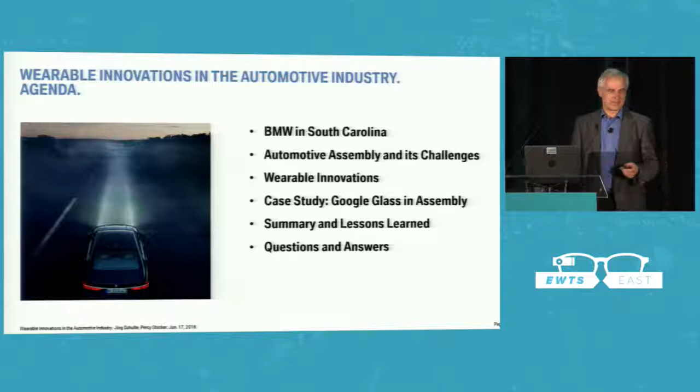We'll continue to do a little bit of ping pong back and forth here, hopefully entertaining and keeps you awake after lunch. We'll take you through a little bit of BMW, not so much the products - I suppose everybody has seen a product around somewhere - but we'll take a look at automotive assembly, where these cars are coming from. Then we'll go into the wearable innovations and projects we've done. We'll focus on one particular case study we did with Ubimax in assembly, go into detail on what we did there and the lessons learned, and then have a discussion afterwards with you folks.

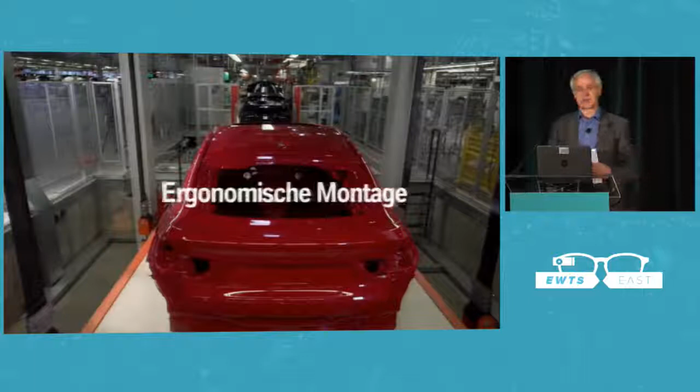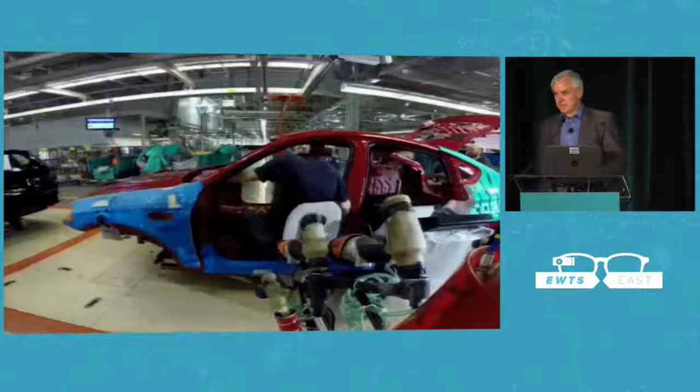So I brought a little video of the plant. This is Plant Spartanburg, it's 21 years old now, opened in '94, and ever since it opened it's gone through a number of iterations in terms of the models being built there. The structure has been adapted accordingly. Over the years it's been expanded to 5.6 million square feet total covered area. The investment was around $7 billion up to this point, and just over 8,000 jobs on site at this point in time. What you see here is a look into the assembly.

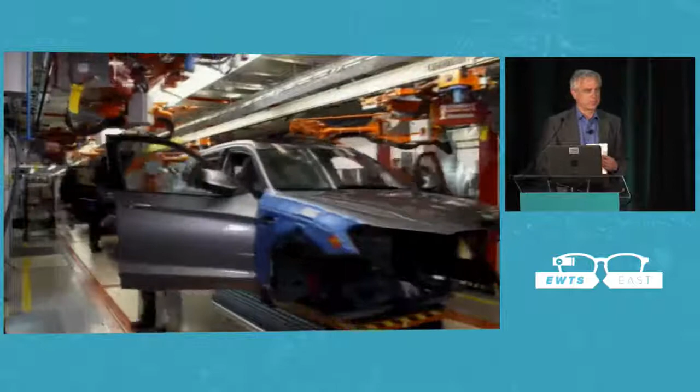Assembly is the third stage of an automotive production plant. Typically you start out with the body-in-white section, or the body shop, where the metal parts get welded together. Then they move into the paint shop, get painted and surface protected. Then they move into assembly, where the metal body gets completed into a complete vehicle.

Another piece of trivia while we're at this: the production BMW is outputting out of this plant is 1,400 units every day, which makes BMW the largest US automotive exporter in 2015, and actually also in the previous years. So maybe something to keep in mind.

Coming back to the 1,400, the heartbeat of this factory is 90 seconds - every 90 seconds we have one vehicle coming out of this assembly line. We have another assembly line that also runs at 90 seconds, and in total that makes the 1,400 vehicles per day, and just over 400,000 units per year. It's really important to keep this heartbeat going, to have that process reverberate throughout all the assembly operations taking place, and that propagates all the way out to the suppliers providing parts just in time or just in sequence.

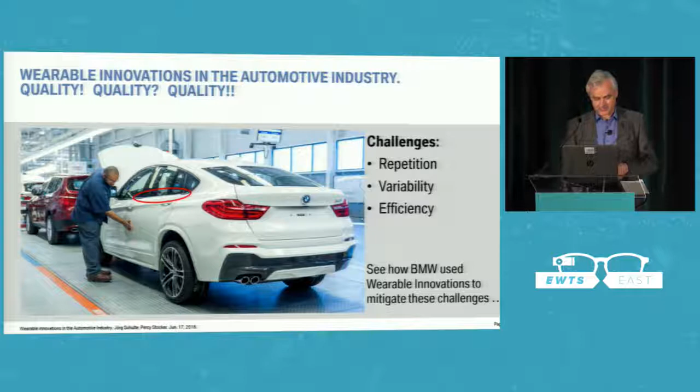Now, for this, there are a number of technologies out there. From my point of view, there are really three big areas opening up that hold tremendous potential to support solutions to the challenges I was mentioning: analytics with deep learning—these kinds of tools are becoming available; the Internet of Things, the connectivity, everything connected to everything else; and then the miniaturization of devices, which allows us to basically wear something like what used to be the processing power of a PC, now wearable in front of our eyes.

The initial focus, of course, will be the miniaturization of devices with connectivity, and that's what we're discussing here today. Going forward, I think there will be a lot more potential once the analytics piece also comes in, once processing power is high enough that we can have wearable analysis of really what we're looking at. But that's, I guess, the future view.

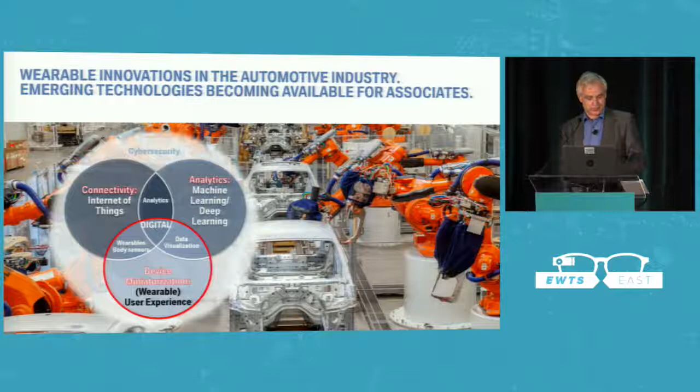All right, so now we'll focus a little more concretely on wearable devices, and more specifically on Google Glass. For various reasons, we chose back in 2014 to do pilot studies using Google Glass initially in our analysis center.

Analysis center—we'll back away from the assembly for a second, we'll come back later on—is something basically like a repair shop, you can imagine. It deals with all the new vehicles and makes sure that when the initial vehicles, pre-series and test cars, etc., are being built, they all conform to standards, that they perform the functionality the way they're supposed to, etc. They also use these facilities during production for any in-depth, root cause analysis that can't be done quickly in the rework area.

The idea was, with this first use case, to really focus on documentation and subsequent communication of defects. So the idea would be that an engineer would record a video, for example, or take a picture, and then relay that information back to the engineering departments. We worked on this with a number of our engineering departments—you can see them there: product audit first and foremost, then the squeaks and rattles team, functional quality team, etc.

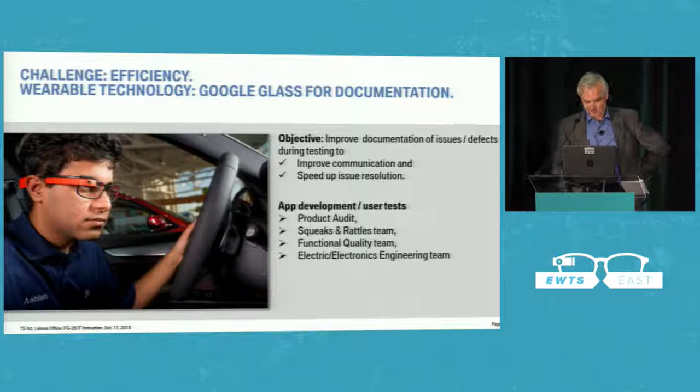And the way we started this project was actually with a sort of mock-up, I guess, at the time we made it—a video showing the functionality.

Okay, Glass. Documentation. Corey Benson, TS53, September 26th, 2013. Shifter rattle. So this seems like it's a little bit loose, this shifter, and it makes a plastic noise while shifting. Send to shifter.

Okay, Glass. End video.

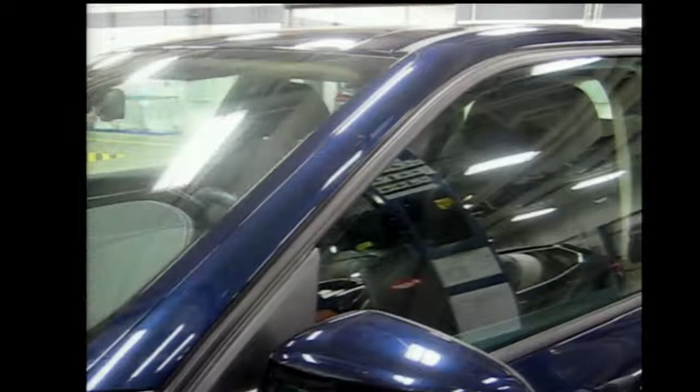Okay, Glass. Call Katie Jerwitz, TS52. Hey, Corey. Hey, Katie. I'm having trouble with this F15 windshield wipers. Can you see it? Yes, I can. I can also hear it hitting the A-pillar. Which car is it? It is 7058. Okay, I'll put in a ticket for it. Great. Thank you. You're welcome. Okay, Glass. End call.

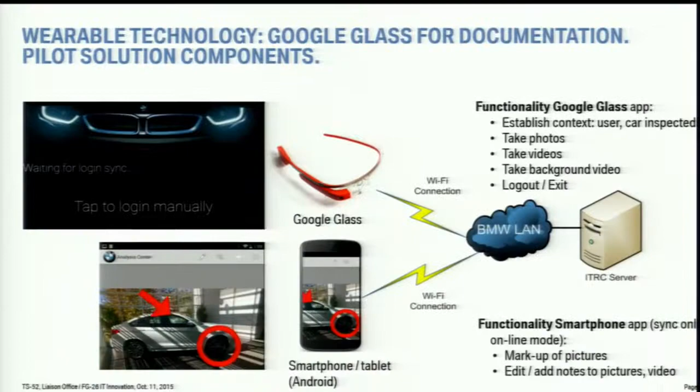So the experience here was that this was sort of the initial idea. Then it very quickly transpired that we wouldn't be able to use the communication function. We had wanted to use our internal Microsoft Lync service there, but for various technical reasons that wasn't feasible. And then the user feedback was such that they said, well, glass is kind of okay, but we want to still modify the pictures afterwards. So we built an additional smartphone solution where you could do a markup of pictures that were taken prior to sending them off.

Now, this project evolved through a couple of stages, but at the end of the day, we did not pursue this further, for a number of reasons. Most importantly, the hardware was deemed not really sufficient at this point in time. In particular, the camera quality for our audit folks, for example, was not up to their requirements, along with a few other hardware-related issues, battery life, etc. And then there's also always the internal processes that need to be sort of aligned here. So it was an interesting and good learning experience and first step for us into this area, but not completely successful at this stage.

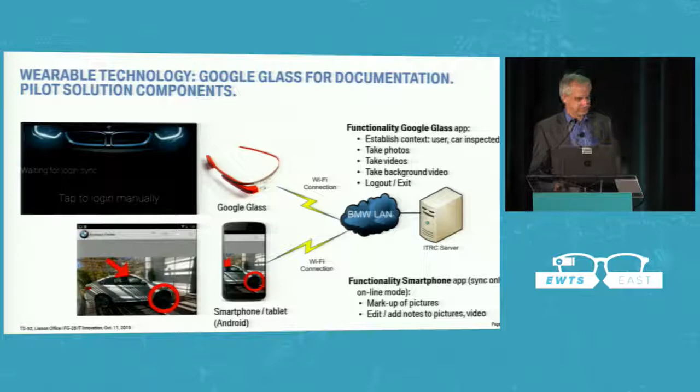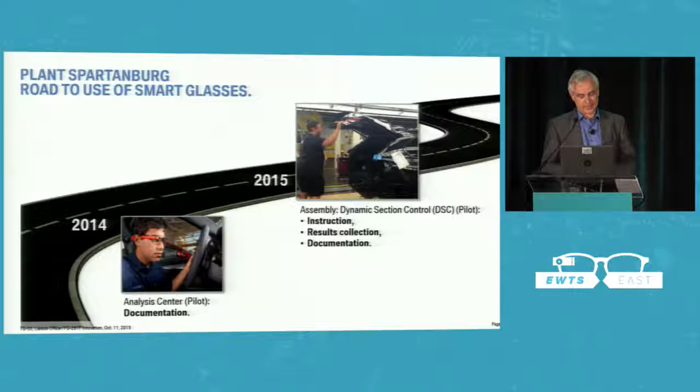Since we did this project internally with the development of the app with our IT innovation lab, we thought, well, maybe some of that lack of user acceptance of software can also be attributed to not doing it properly. So that's when we teamed up with Ubimax and said, let's get somebody in here who can do this professionally. And let's see if we can also move to an area that is maybe in more need of a solution than our analysis center colleagues. So at that point, we started out this project on the inspection in assembly together with Ubimax.

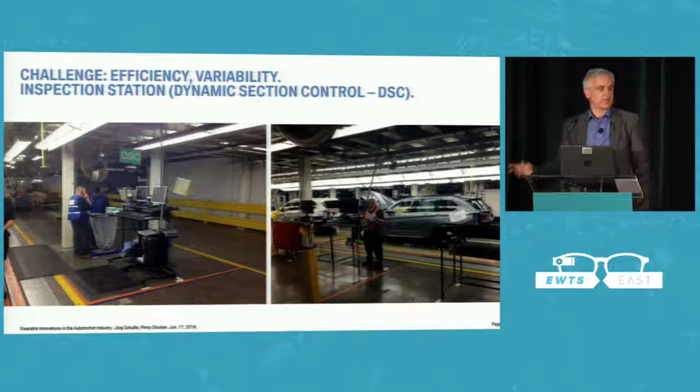So inspection, this is a shot of the actual site that we did the pilot at. It's basically on the line in our older assembly hall. It is an inspection station that has the PC. There, the picture on the left, you can see the PC, which faces the assembly line on the other side. The process works such that the associate uses the information from the car, the barcode that is on the vehicle, to pull up the information on what is to inspect on that particular vehicle. That comes up on the PC display. You can see that on the right. And after the testing, the feedback is reported on that PC.

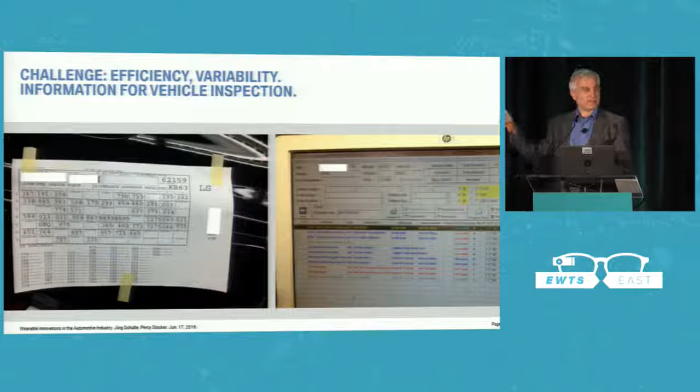The challenge here is, again, the variability and the repetition. So again, the 90-second takt time, the high variability of the vehicle. Every vehicle is different. And this inspection list is not static. This is something that gets updated, as for example, problems with parts coming in which require additional inspections could add to this list of things. Or some internal issues that were found in final inspection would be propagated to this particular station for additional inspection, etc. So it's something that changes over time.

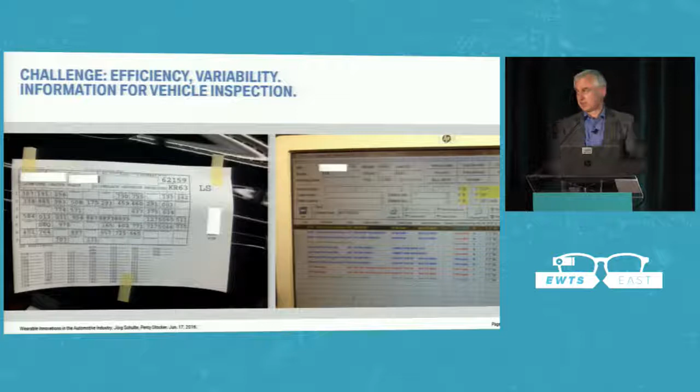And the big motivation for us was to make sure that the associates doing the inspection really catch all the items that need to be inspected and confirm each one of them individually, especially for the more exotic options that they may otherwise overlook.

So it's really the walk time back and forth from the PC, but it was mostly really about the accuracy of the inspection, and then also the communication between inspection and rework that we wanted to improve, because there was a lot of back and forth on questioning, well, you reported a defect for this vehicle, I don't find it, can you tell me what it was, etc. That comes back to the problem that with the PC system you only have particular pull-down menus, and you can't really describe things in very detail. So taking a picture is a lot more useful, and a picture says 1,000 words in this case.

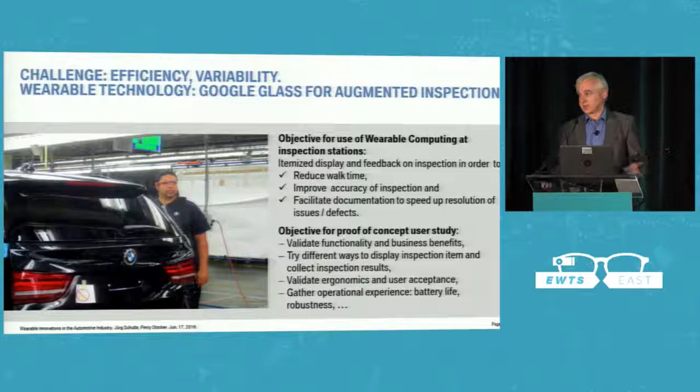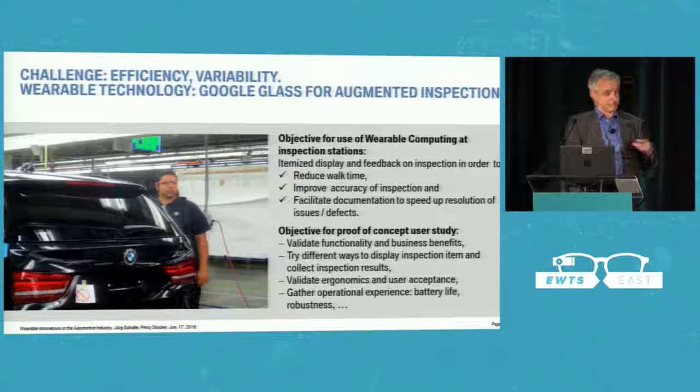So the project with Ubimax focused on really implementing a solution here to validate the functionality and the business benefits of Google Glass here. Work with the associates to see if they would be open to wearing these things, what the ergonomics were, and then also gather some operational experience and see what it's like with the battery life, etc.

Thanks, Jorg. So let me now talk a little bit about the Pilot.

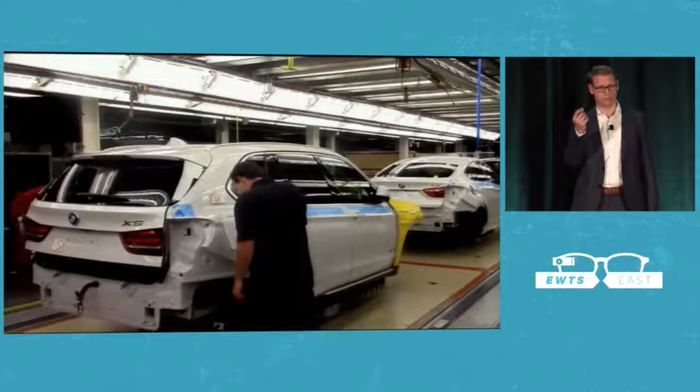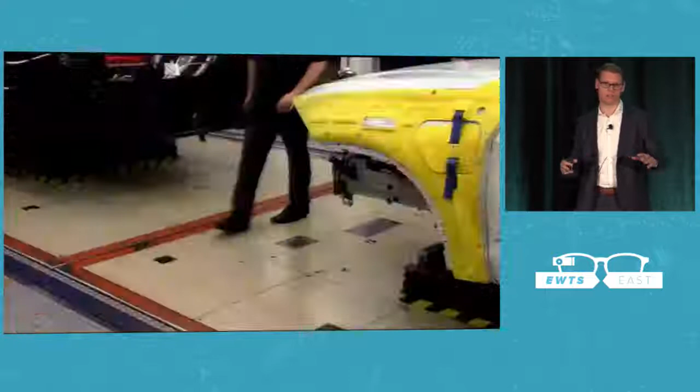We start out showing you a short video so you can see the guy logging onto the system. He's wearing a Google Glass. We stuck with Google Glass knowing there are still some issues with it, but companies are working on that. You can see the guy moving around the car now. This is a classic example of when it's really beneficial to be able to move around freely, and you can see he's grabbing stuff. Having his hands free is key to the process.

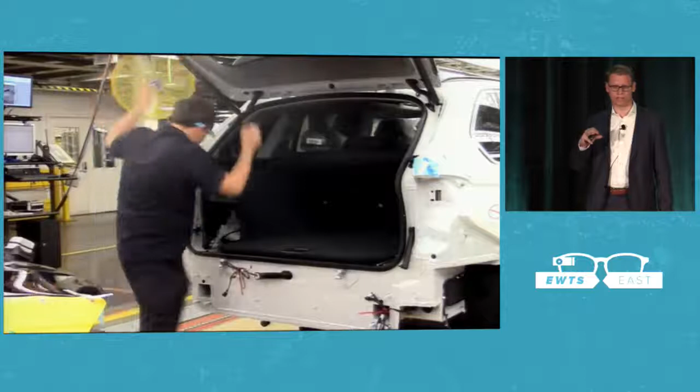You can see he's opening the trunk now, taking a look and using the glass. The glass is guiding him around the vehicle and pointing him to the parts he needs to pay attention to and do the quality checks.

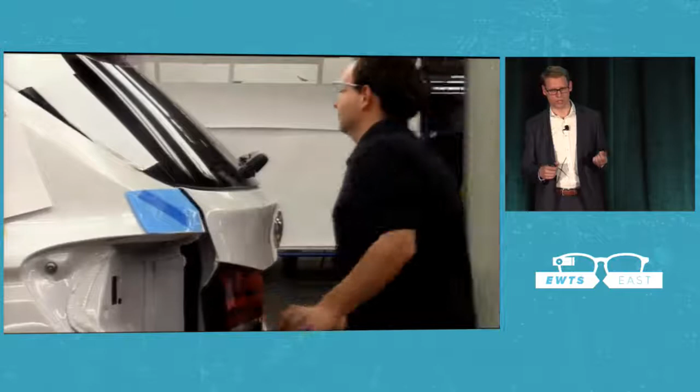The good thing is that we were able to do this really in the productive environment. This is not something offline or done in a safeguarded environment. We really did this on the line in production to get the insights that BMW needs to go further in that direction.

It's also a classic example of where the current technology really doesn't meet the requirements of the process. Having an offline PC — I can imagine I'm doing some work here, and the information I need is right on that laptop, maybe even further away. How am I going to not miss any points if it's not a standardized process?

Every car is different on the production line, and there are different spots I need to take a look at. Even for each model, these spots change in terms of the current findings from production and what parts need a specific look. So I've lost right from the beginning if I'm going to use a model like that.

But if I use wearable technology, I have the information right in front of my eye that I need, and then I can freely walk around and do the documentation where I find it — instead of, when I walk back, having probably forgotten most of the parts I wanted to note down.

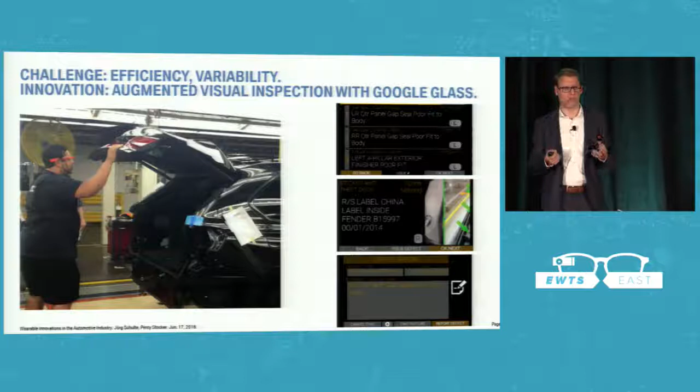You can see in the middle picture here, you have some additional information, a picture showing you what to do, some indication that it's on the right side of the vehicle. It's very easy, grabbable information from a visual point of view to guide you to these points, and they can change over time.

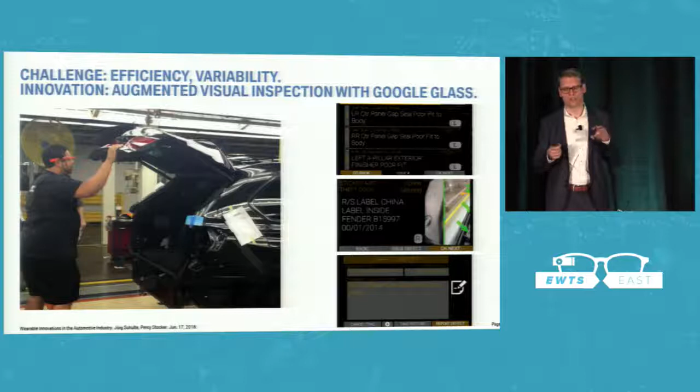When you actually come across a defect you want to document, you can do that right at that point in time when you find it. You don't have to move somewhere else — you can take a picture right then, select via voice from a certain amount of error codes the right one, and document the defect right at that point in time. That's very powerful to do.

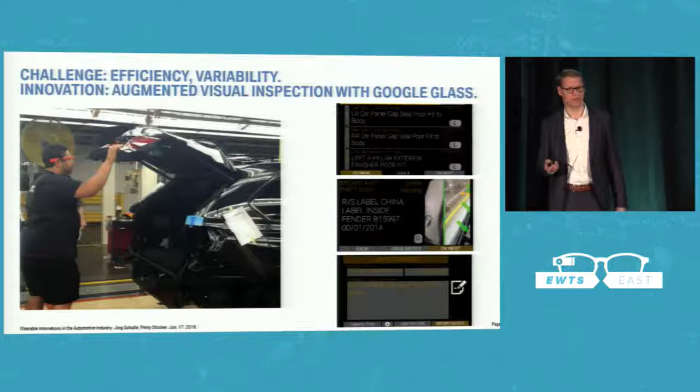Let's take a look at the facts around the study. The study was performed from two sides: there was a more academic view by Georgia Tech, who did the study results and things like that, and there was the part Ubimax contributed in terms of the software we developed. It's important to know this took place roughly a year ago.

So some of the learnings you will see here in the study, I don't think there will be many completely new things, but it may be some confirmations of what you already know. Some of the learnings have already been implemented in a lot of work that we have been doing, or that BMW has been doing going forward.

So there were 17 people involved with this study. They did these checks on the production line. They had a short introduction on how to do it, and then they were performing the task for about 2 to 3 hours, and then they had a debriefing. So it's important to know that an individual gave feedback after just 2 or 3 hours of work, not a week-long learning experience.

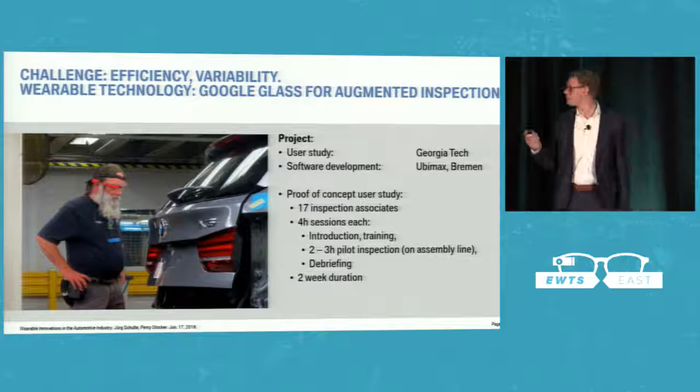The study took place over 2 weeks, roughly a year ago. In terms of the people doing it, and that's something we believe is very important, it's really the people that would normally do it. It's no use picking people with a master's degree in computer science who've worn Google Glass in their private life for so long. You need to pick people that actually would do the job.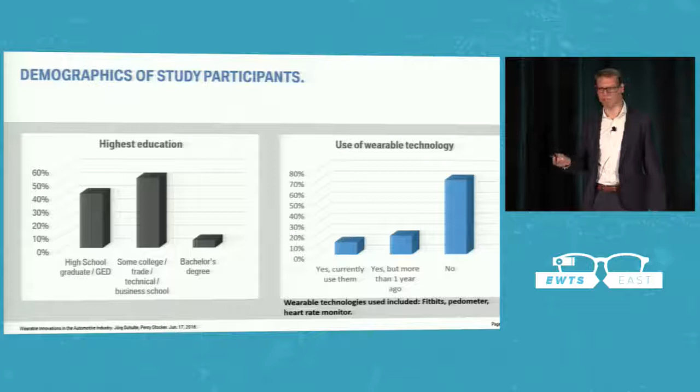That's also important to know - realistic environment. That's what we do in all of our projects. We recommend really picking an environment that is realistic.

Let's go to the feedback. I'm sure there's probably nothing in there that really surprises you. The first thing is the hardware, and we all know that hardware, especially if we take a look 1 year ago, may not be as advanced as it is today. There's also a little bit of specifics in there.

Georgia Tech was so kind to select a huge battery pack to go with that. We didn't select that one. So some of the stuff, there may be some learnings there already today that will change things.

People were, when they used the Google Glass, sometimes confused a little bit with the swipe and tap gestures. So you have to be careful what kind of interaction methods you use. But bear in mind these people didn't use it for a week or so and have that learning experience - it's really short term. And even in that short term, Georgia Tech was doing some analysis, and it really got more fluent and efficient already during that time.

From the software point of view, one of the most challenging parts was the voice part. Here it's also important to know a little bit about the surroundings - we didn't do it in an empty room. It was right on the production line, and it's very noisy there. You imagine these bands with the vehicles running back and forth, and then there's also these signals where people can pull a cord and basically request help if they have an issue with one of the assembly steps.

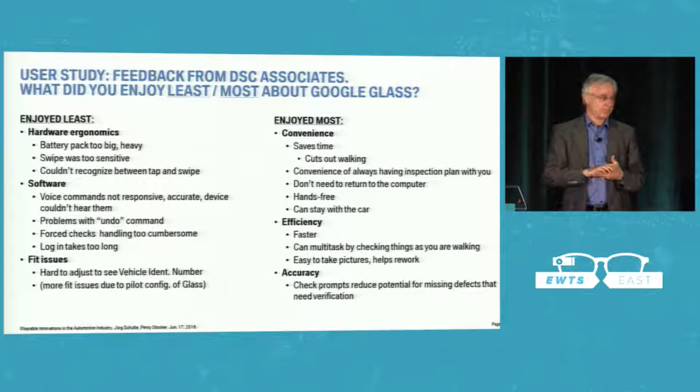So when we look at the learnings, or what we'd ask the hardware vendors to take a look at, from all of our sides it's rethink user interaction. That's been talked about a lot yesterday too. We're still used to the mouse and keyboard, and we try to apply the same thing to wearable technologies, and it just doesn't work. We as an integrator are often asked by customers, hey, we have this solution, can we do a quick proof of concept and just port that onto a smart glass and have it running there?

I'm not sure how often I've gotten that. And it's very difficult to talk people out of it, because yes, we can do that, but it won't do you any good. The only outcome will be that the technology sucks, that's what people will take out of it. And that's dangerous, so we usually refuse doing that.

In certain ways we need to go along with customer demand, and that's not so much BMW-focused, it's more broadly from all the projects we do. In a lot of iterations you'd typically have in such a process, you usually get closer to what we originally suggested, but sometimes on the customer side that also takes some effort. And on the hardware vendor side, it needs to make sure devices are intuitive to use, with gestures and things like that, gestures you can distinguish.

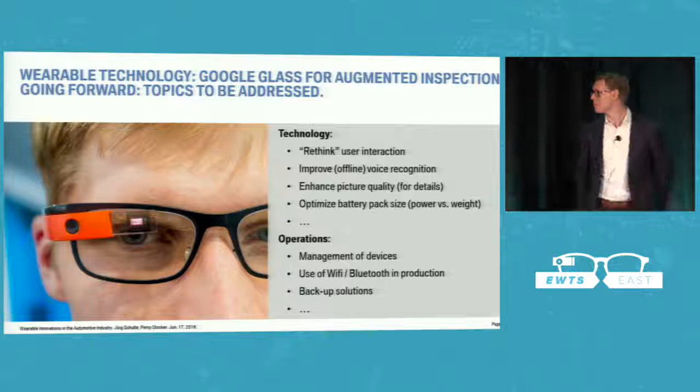Maybe the bottom ones real quick - there's also a bunch of internal things that need to be prepared if you want to use these new devices. You need to manage them, you need to make sure that the Wi-Fi is actually allowed, which is something we're actually still currently working on. Backup solutions, what happens if they're not available, et cetera. So there's quite a bit of homework that needs to be done before they can really be rolled out, and that's something that certainly can't be overlooked and needs to be accounted for.

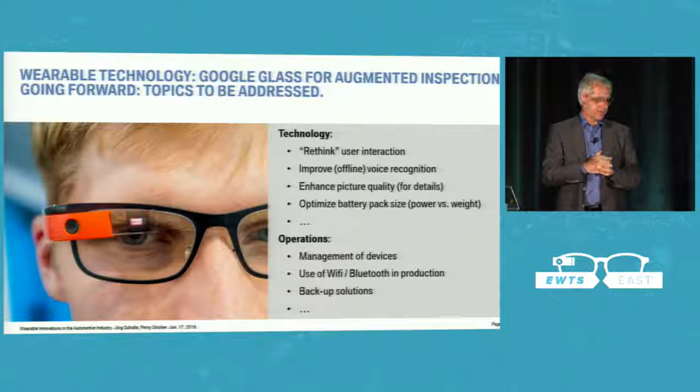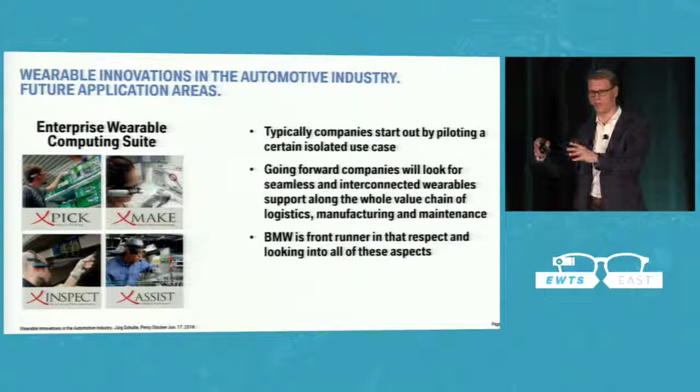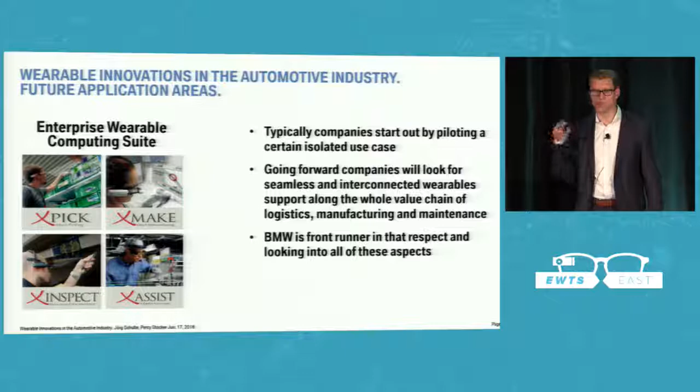I know we have to speed up here. To put that in the broad perspective, we were looking at quality assurance here, just to give you some insight as an integrator of what we see as demand and what our customers are looking for. In this case we were looking at quality assurance, but we believe companies will start within one use case, one vertical, but will want to expand, so they'll be looking for solutions that can expand across the whole value chain. You might start with logistics, bringing parts to the assembly line, but once you have them on the assembly line, you want information on how to put them together in the car. Then when you have the ready-to-go product, you want the same car information integrated with a maintenance system, to know how to do maintenance. And if you're stuck at some part in the process, you want to be able to call someone with a remote assistance functionality to get help. We see all the customers going in that direction, and we support them with the Wearable Computing Suite, where all these aspects are integrated. BMW has a similar vision, looking into all these different topics, very innovative.

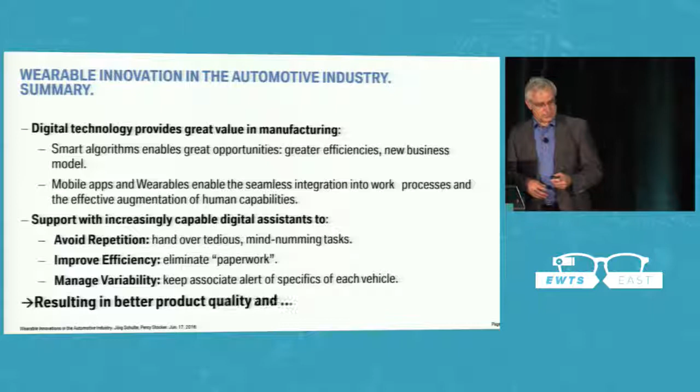All right, quickly summing up - I think bottom line, at least as of the status one year ago, this was not ready for prime time. Not something that could be deployed, for the various reasons we discussed - the technology not being where it needs to be, and the organization not being prepared internally to really do this. Nevertheless, I think it's very important to take steps like these pilots, to gain that understanding, to see what's missing, what I need to pay attention to, and basically get our feet wet, so that once the technology is available - and I'm sure it will only be a short time - we're ready as an organization to accept it and roll it out. We do see big benefits in terms of repetition, efficiency, and managing variability, and hopefully that will result in better product quality for all of you to enjoy in your new BMWs. Thank you very much.